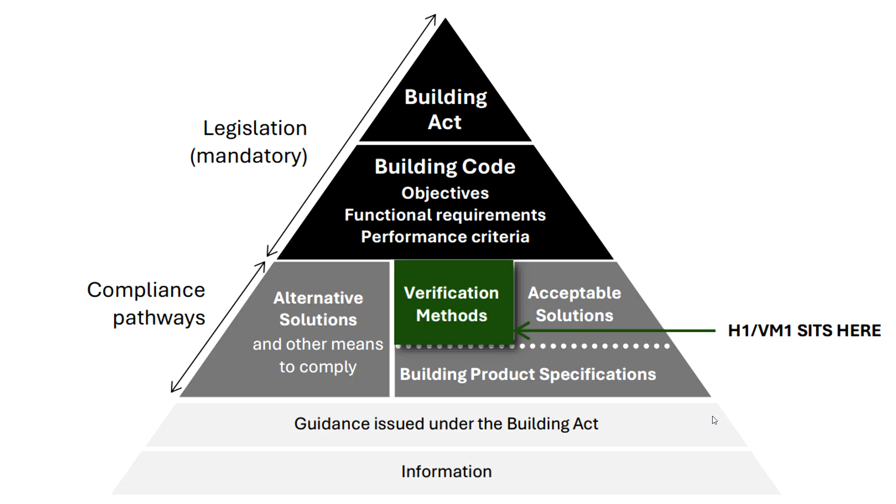Now, as you'll note, they are for buildings up to 300 metres squared, so housing primarily, or buildings connected to housing, occupation of a space equivalent to a house, because you can do communal housing, that type of stuff through this as well.

But the positive side of things from a H1 perspective in general is that the schedule method has now been removed. I say that's positive just because the schedule method in H1 was only providing a very opaque compliance pathway, whereby it was hiding certain elements of design, which actually continues in part the narrative for the calculation method, and it was certainly leading to good outcomes if you design properly, but terrible outcomes if you didn't, and often over-engineering buildings as well.

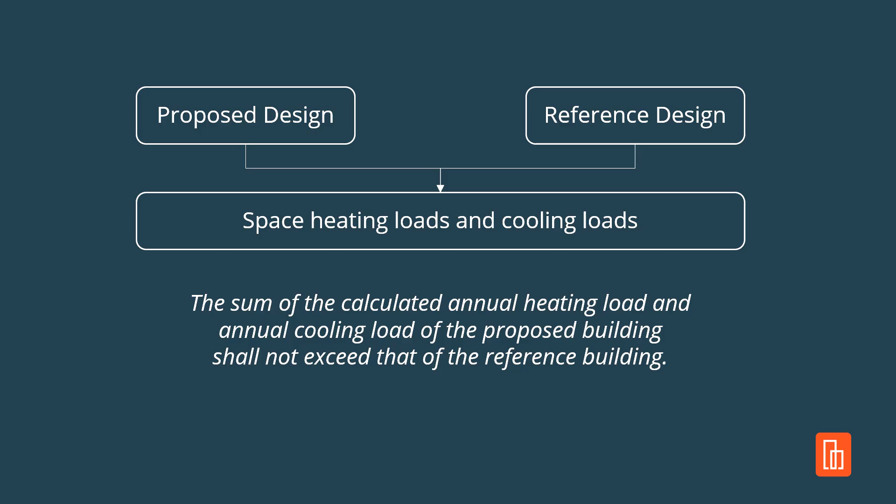So in other words, your proposed design must be better than the sum of the space heating loads and cooling loads than the reference building. So there's lots of stuff going on here.

Now, when it comes to VM1, practically speaking, there's a bunch of things that you can vary from the proposed design to this reference design. So the next sequence of slides are very much around the things that you can potentially improve, like the wall construction, R value, and thermal mass.

The other thing that can change is floor construction R value, really important - I'll come back to that in a second. Roof construction R value and thermal mass, not sure about the thermal mass side in reality, but the roof construction R value can vary between the proposed and reference and provide you a point of value.

The next one, big one, is glazing - big tick in the box there, one of the big ones to focus on in the proposed design. You can also improve doors, though that's very difficult. When I talk about doors in this respect, I'm talking about opaque doors, your classic entrance door to a property. They're very hard and expensive to change, but defaults of an R value of 0.3 are typical, which is pretty bad, given that an R value of a wall is 1.6.

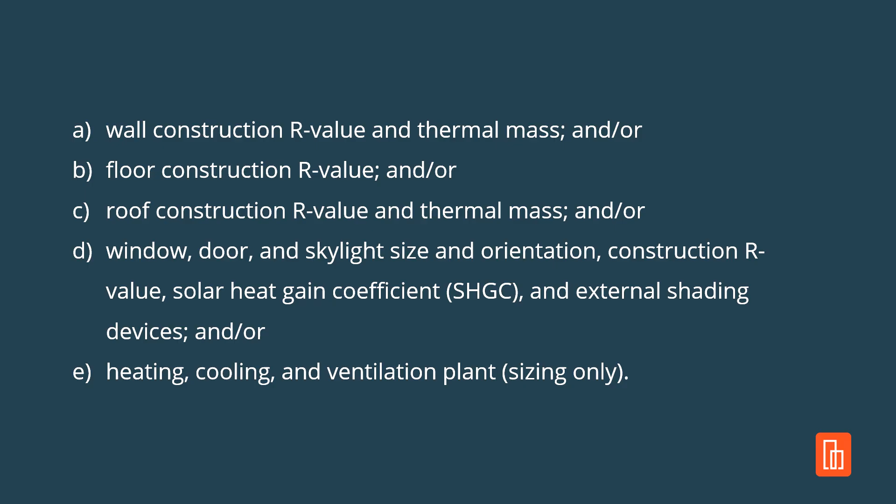And then we have heating, cooling, and ventilation - that's a statement in VM1. Effectively, you can ignore that because it's automated in the VM1 methodology.

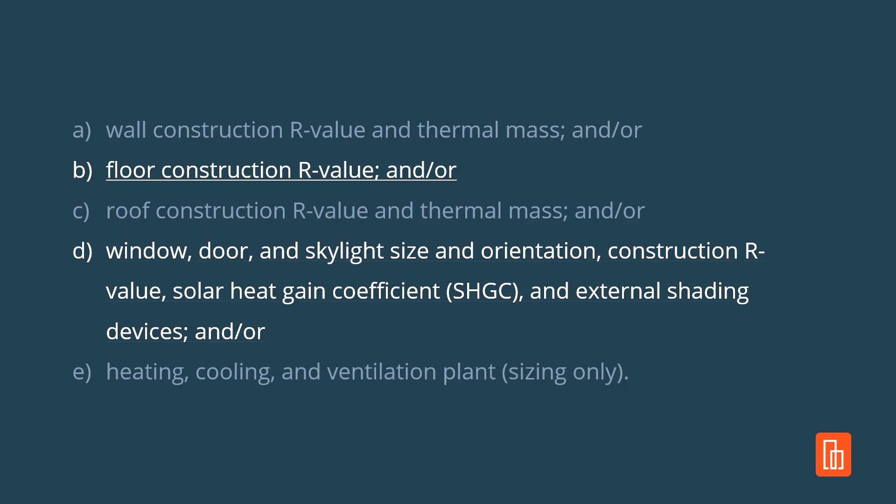So the point to take away is the reality - and I say reality based on the fact that the wall construction R values and the roof construction R values are already in ballpark better value land, and they're difficult to improve for standard construction methodologies. The floor construction and the glazing systems, maybe skylight systems as well, can be improved, and from my perspective those are the points of opportunity to improve the proposed design against the reference design to meet the compliance pathways of the code. They are the big ones. We can circle back to those at some point.

Now, my reading of the code is that there's probably about 10 things that are opportunities, or 10 things we need to understand that have changed. As of a couple of weeks ago, we've already launched all of this on the platform, so you really don't need to worry about any of it - it's all already automated for the reference building, and you can check it out yourself.

But the first thing is that the climate data has changed, in terms of being more specific about which climate data we should be using. They've just referenced the NIWA climate data there, which is fine. If you're over in other software, you have to convert from the NIWA climate data into the weather file format of that software in order to be apples for apples on this point. So not a big one - fortunately the climate data is provided.

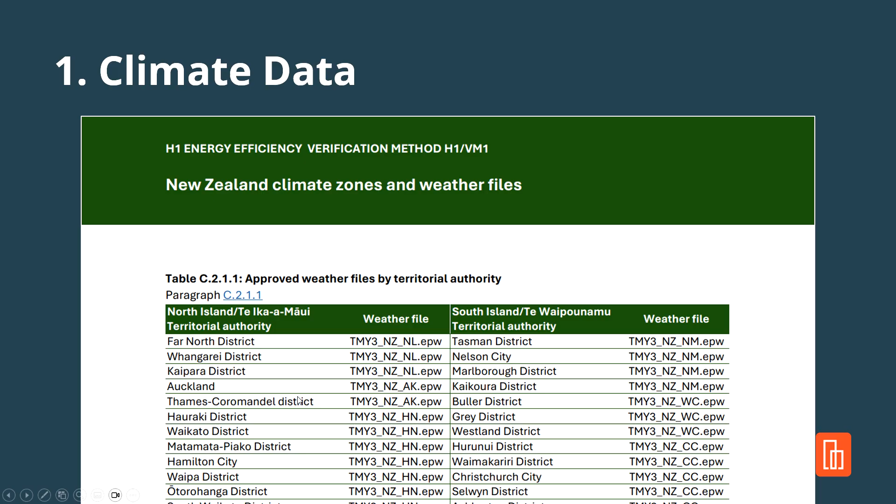It's provided in a list in VM1, so that's a good thing. It is clustered a bit, so you can see here, for example, the far north, Auckland, all the way down - these top three here are all the same climate data. Auckland and Thames-Coromandel district, that's all the same climate data, and all of these ones down here are all the same climate data too. So it is fairly simplified, and I'm not in a position to say how accurate that is.

But the other point here is that you can grab access to these climate files - they're freely available. Go ahead and locate those. They're on the Building Performance website, and they're very, very easy to find.

So have a look at those. And that's climate data done, out of the way, 9 more to go.

Next up, solar heat gain coefficient. This has been a bit of a bugbear of mine, to be quite honest.

There's a hand up there. Diane, did you want to get into that one? It was just about solar heat gain. I've actually put a thing in the chat, but you're already going to talk about it, so that's fine. I'm probably going to complain about it. Yeah, exactly.

So all good. Solar heat gain coefficient has been a really interesting one from my point of view, because the New Zealand industry in general has not been overly aware of solar control in glazing. It has definitely become much more aware of thermal performance, or total R value, construction R values for glazing systems and joinery systems, but it has not been fully aware of solar heat gain coefficients.

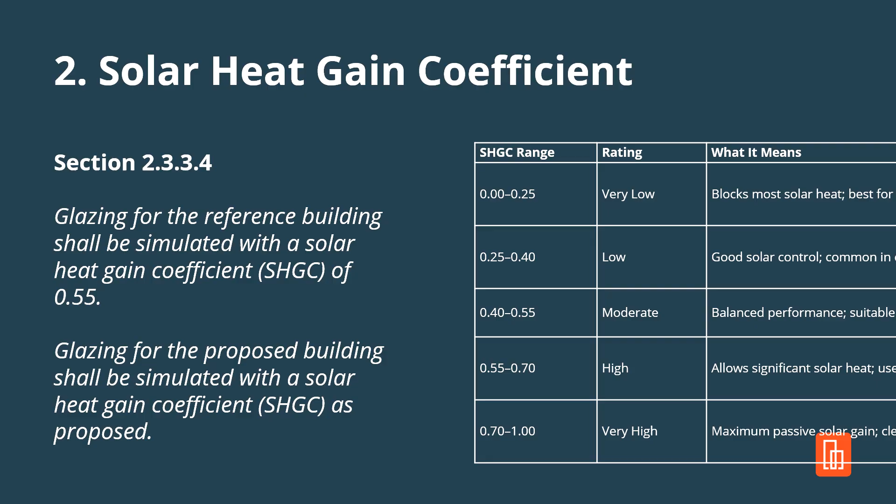And I've been in a position multiple times where I speak to architects and they don't have an exposure to solar heat gain coefficient. I think that's going to change now, because effectively the numbers have been determined for the reference building, which they hadn't really before, right? So there was flexibility, and the new number for the reference building is 0.55. Okay, so that needs to be locked in now.

And if we have a quick look at solar heat gain coefficients, I'm just going to highlight here really what are typical solar heat gain coefficients from a home perspective. Okay, so you do have numbers outside of this range, but effectively between 0.4 and 0.7 could be deemed as being typical. Now you'll note there that I pop on high for 0.55 to 0.7 as a rating, and moderate as 0.4 to 0.55.

The reason I do that is that the moderate, from my perspective, is where all homes should be. No home should be higher than 0.55 under any real justification, unless all glazing is facing towards the south and there's no risk of overheating.

Diane, did you want to jump in there? I'm not disagreeing with anything you're saying, and I agree in terms of the moderate and the high, but my argument is that solar heat gain coefficient should not be in our code. It should be G value, because that's what we use in New Zealand glazing, not solar heat gain coefficient. And they can end up with different numbers.

And if you compare like with like, solar heat gain coefficient is based on a US standard that we don't use in New Zealand. Hence, G value will give better results. So I guess I'm frustrated that solar heat gain coefficient is still in the code.

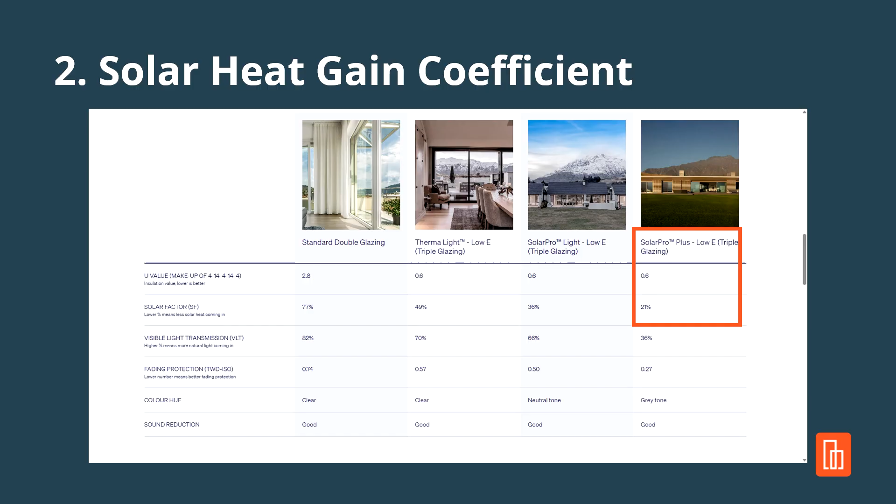And if you get down at 21%, you've got really quite dark glazing, and you're very, very unlikely to want 21% given that the reference building is 55%. So you probably would never pass the reference building. So yeah, there you go. That was solar heat gain coefficient, number 2.

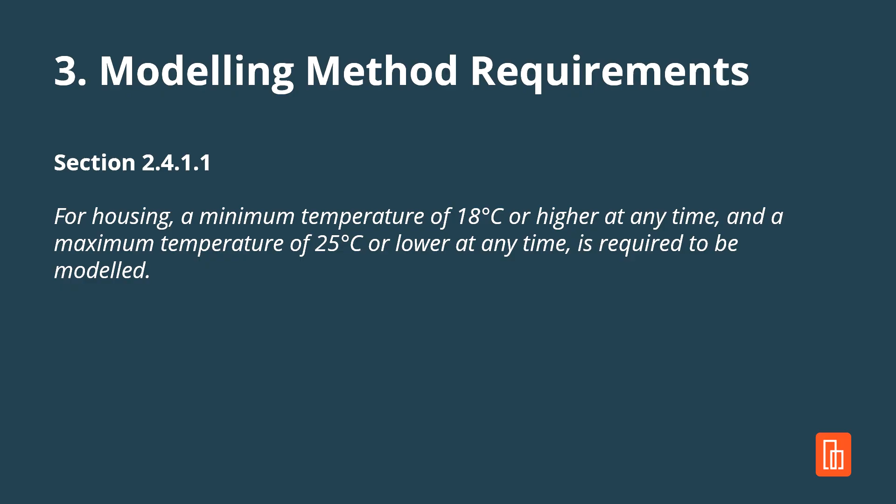Number 3 is the modelling method requirements. This is really just looking at - I forget what, I got it - this is really just looking at ventilation. And I'm just going to flick through to the next part of this here.

So ventilation from a window perspective has been treated as having a number of 24 degrees as when a window is perceived to be open.

And ignore the word salad on the screen. So 24 degrees, and then it was perceived to be closed by modelling methodology at 25 degrees. So that is effectively a maximum of 1 degree when the window can open. Okay, that's now changed, and that's an important change because it will fundamentally change the outcomes of the model.

When you only have a window open between 24 degrees and 25 degrees as per the previous version of the code, then it means that you're going to build up heat within that space, and you're only going to purge the building between 24 and 25 degrees. But now the 24 has been adjusted to 22. So what that means is that theoretically both reference and proposed design will be opening their windows at 22 degrees and closing the windows at 25.

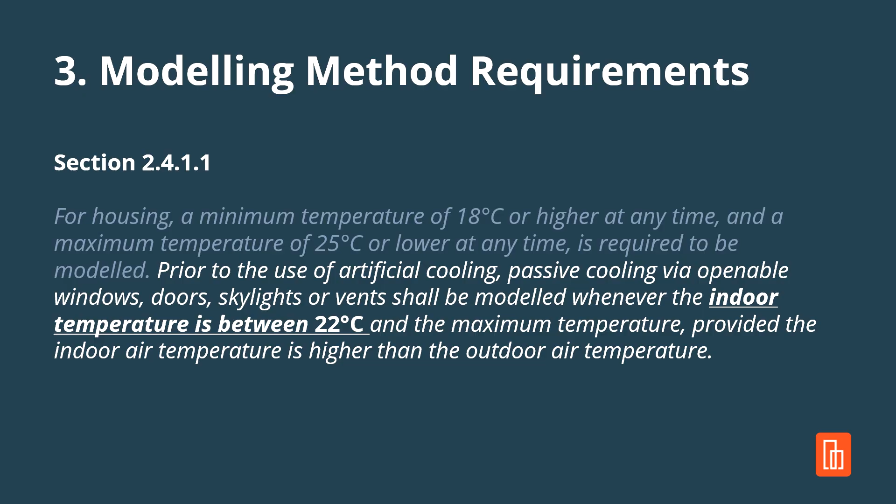That doesn't seem like much, but what it means is there's going to be a big theoretical purging of the buildup of heat within the space that effectively artificially cools down the building and reduces the cooling demand. Okay, so it's a very, very important one theoretically because it means that there's a significant change in the design.

Now, there hasn't been, and you can continue to ignore the word salad on the screen, there hasn't been a massive amount of support in terms of the types of windows, the percentage of opening of windows in H1 in general. So that is a market-based discussion about when things are open.

Our advice is to always err on the side of caution and just assume that effectively windows are only going to be open a small bit, and the last point here is that window restrictors are probably a good way to assume that. So don't overestimate how long your windows and how open they're going to be. Just be conservative about this particular element.

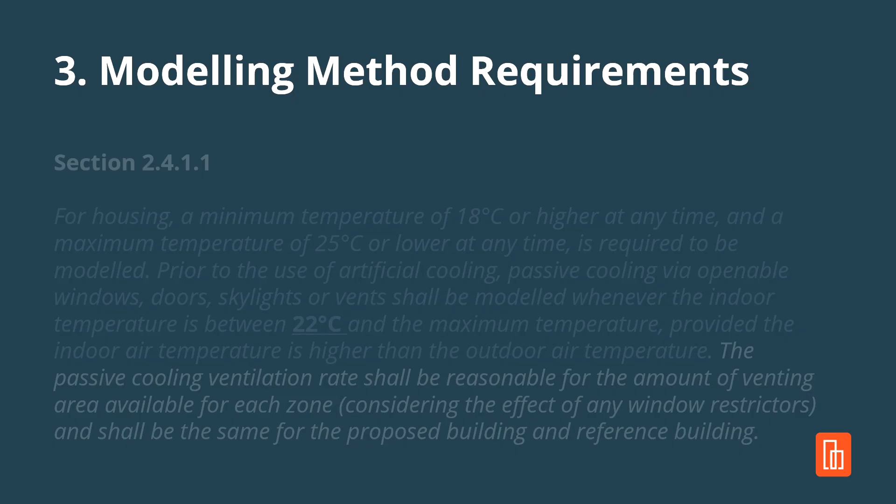So it will change the outcome, and it will mean that the design opportunity that is potentially there today is no longer going to be there with the new version of the code, because the code is not overemphasizing cooling anymore. Okay, so via VM1 there's going to be a reduction in cooling, which is fine because it was overstating cooling requirements anyway through the 24 to 25 degree scenario.

No, not at all. Does this modeling always rely on you having a continuous ventilation system? Because given that in the general building code, we don't require continuous ventilation, so the code allows people to open the windows and requires them to open the windows every day just to ventilate the house. And I'm just listening to this and I'm just like, so this is only for when you have continuous ventilation running, or is this applied to?

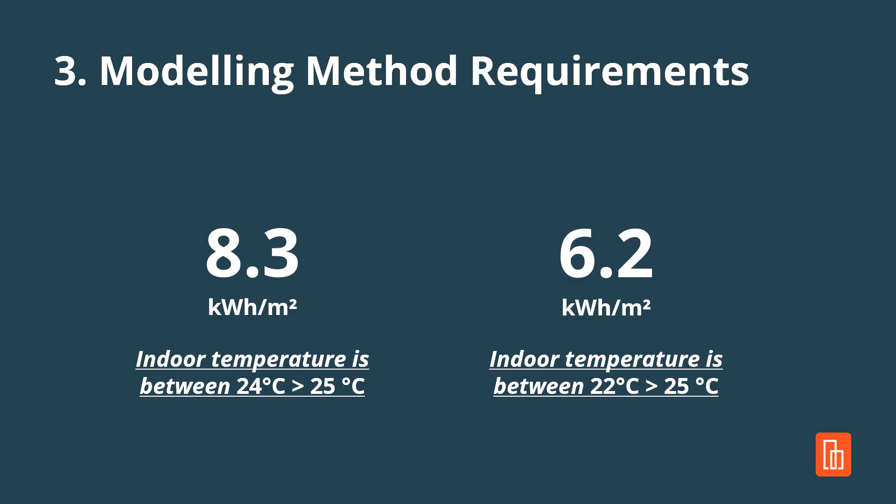The only place this is really of value, I think, is within maybe bedrooms or something like that, where you assume at night people are going to open their windows by a crack, and that's it. So a very local application of it, pretty much as you would do if you were designing in Passive House, for example. Hopefully that answers your question.

I'm going to move on to occupancy and plug loads. Now, there is actually a bit of a Passive House overlay to this particular one, because what we had in the previous version was really, really high internal gains from occupants and from plug loads. Now, there's been a couple of changes here. The big one is plug loads, and the much, much smaller one is just a determination of the occupancy.

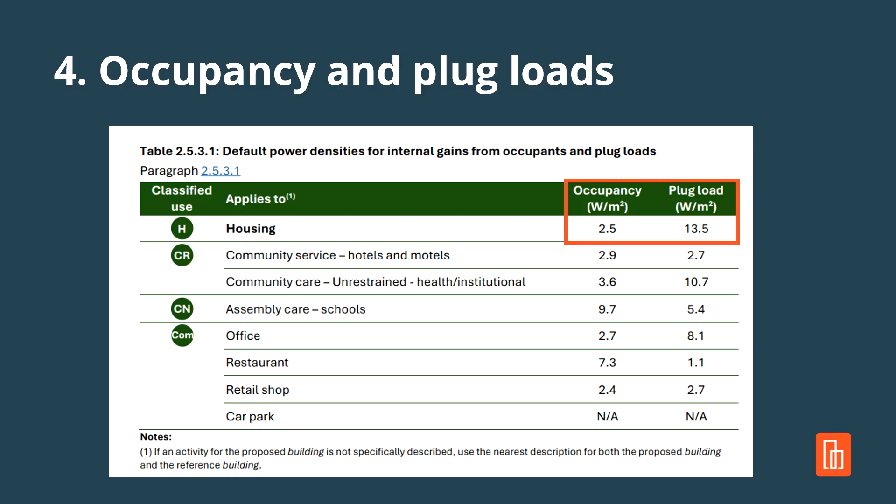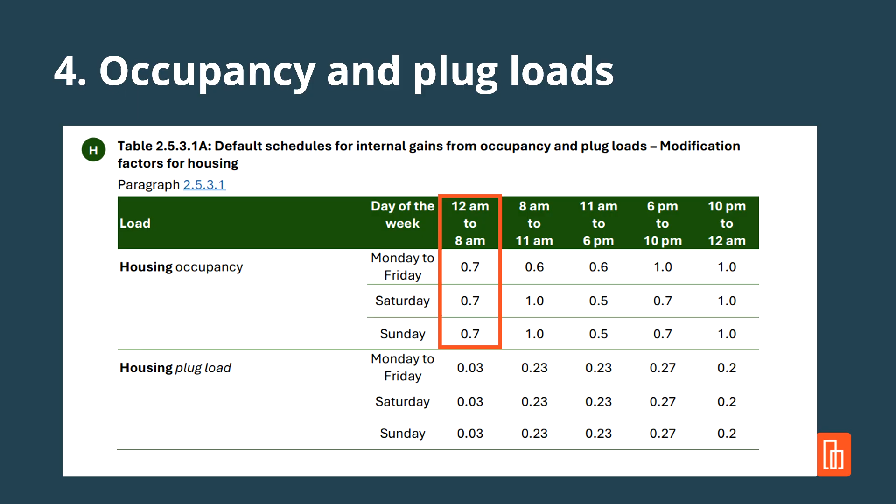All I can say is that 0.7 was 1 at one point. So for some reason, 30% of the people are leaving the house at night. Don't know. We can make up a scenario as to why that's happening. But that is that. So that's handled anyway in the new version of the code.

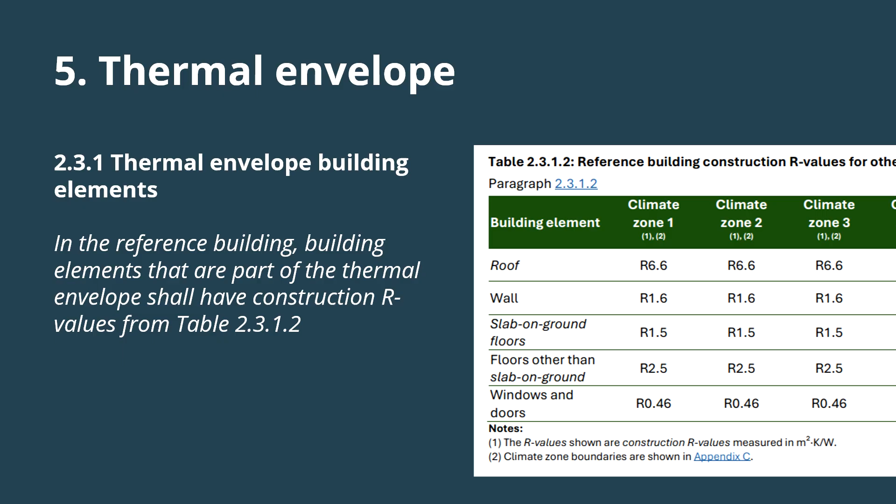Next up, another easy one, which is the thermal envelope itself. Okay, so a couple of tweaks to the construction R values. And I think Diane was bringing up this straight out the gate, just in terms of the wall R values. So we have 1.6s instead of the 2s. I think the 2s and 2.2s. I forget now what the previous versions were, but it's pretty much 1.6s across the board.

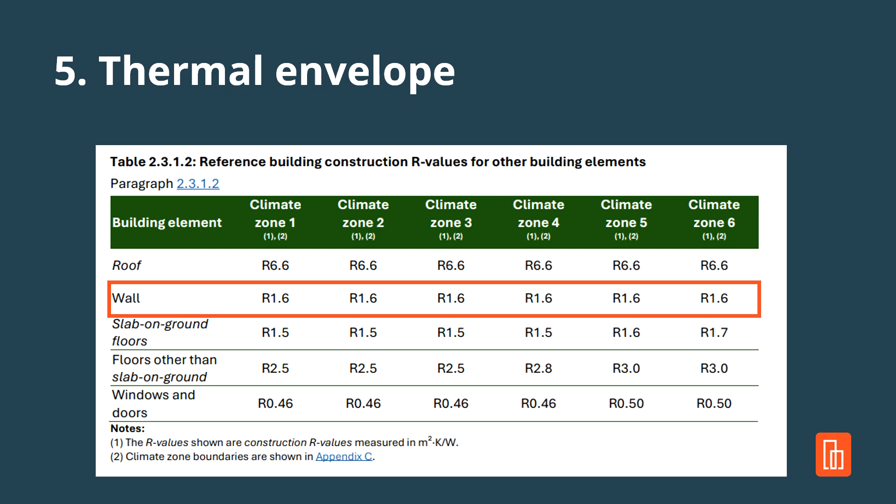And I'll go into the narrative as to why that is in a couple of slides time, but effectively the reference building is now saying 1.6, so it means that it's just a little bit more relaxed. It shouldn't be. They're pretty low values, to be quite honest. I don't think values below 2 should be justified, but they are what they are. It feels like a bit of a political hot potato, that one.

Heated floors, here we have a clarification, guys. The clarification is just essentially that previously, if you were going to heat floors, it was unclear how far you needed to expand your insulation strategy for the heated floor. So, for example, if you had a heated floor in your bathroom, did you have to effectively insulate all of the slab, or was it just part of the slab? And obviously that doesn't make much sense, insulating part of the slab if it's just a bathroom.

Here they're just saying that, hey, look, minimum construction R values do not apply to heated ceilings. Question mark, I still don't know what they are. Heated walls, still don't know what they are. And heated floors, if the heated floor is installed solely in rooms that only contain a shower, bath or toilet. So just a bit more of a relaxing there.

Next up, we have multiple unit dwellings, and this is just again a methodology thing. So if you have a model and it's for housing with multi-unit dwellings in this particular case, the new version of VM1 states that the building may either be treated as having a single thermal envelope, and that's very, very much for the Passive House community, or having multiple thermal envelopes with different housing units having their own thermal envelopes. So it's saying that there's two methods there.

I absolutely disagree with this. I think it's absolutely crazy to model a multi-unit dwelling as having a single thermal envelope, because effectively these are owned by different people.

So if you have a single thermal envelope and you split that up into different internal envelopes, then you're going to get a very different thermal response within each of those spaces, each of those homes, each of those apartments, and they must be designed individually. This is not what this states. This states that you can just dump it all into a single thermal model.

Now, we're going back to the walls now, and really there's two items here. There is a direct modification of the 4214 standard. And there is probably something that Diane was alluding to, that R1.6 for the walls, mentioned a few slides back, default now for the reference building. Where it effectively comes from, in my view, is that if you throw a batt into your 90mm stud wall,

that batt has an R value of around 2.2 with a 38%, which is an industry adopted value based on research done by, I forget who it was done by, feel free to shout out anybody. Placemakers using their Frameology. Thank you, yeah, exactly. So they determined the average thermal bridging through timber stud was around 38%. So effectively, if you throw an R2.2 batt into a 90mm stud, you'll get a value of around R1.6.

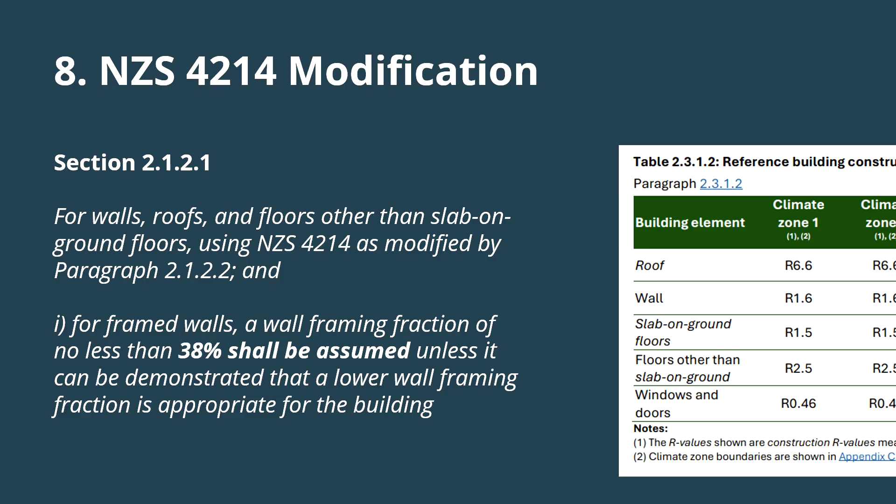There were talks, and we as a company attended those talks, in terms of superseding it with the calculation methodology within PHPP, which I completely agree with, but that hasn't been adopted here. 4214 is a very old standard and has lots of questions around its useful application, particularly in commercial buildings.

Now, getting to the end of this, this is 9 out of 10, guys, and then we'll stop for a few questions and then provide an opportunity to have a quick break, glass of water, and then we can jump into the second part of the session.

So internal dimensions, this is just clarification. Internal dimensions should be used if you want to measure the overall thermal envelope floor area. So that is just a nice clarification that probably resolves the fact that some folks are using external, some were using internal. On our platform you can use external, the middle of the wall, or internal, just with the flick of a switch.

And the final one is just domestic hot water, guys. So effectively you've got to dump a heat load of 100 watts to represent a cylinder of hot water within your building if you have that domestic hot water within your thermal envelope. So a very small and nuanced thing, again, doesn't matter. This does not matter, okay? Whether it's there, whether it's not there, does not matter. It's there as a point of inclusion within the model. Now, that was my top 10.

I'm going to throw the camera on just for a second. Did I miss anything there? Were there any questions before I take a quick break and jump into the practical examples thereafter? Anything, guys?

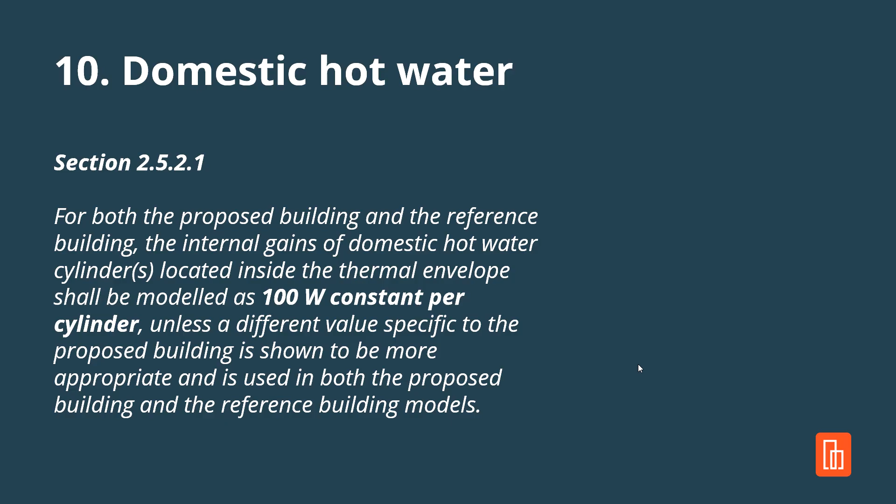Okay, cool. Well, if there is none, I've got some practical examples that I'd like to go through, and I've got a model. The model has been set up for worst case examples, extreme examples for Auckland and for Queenstown, just because I wanted to look at the extreme climate positions. If anyone wants me to set up another model in this session, I will. Just shout out where you want it, maybe something that isn't in one of those locations, and we can go ahead and set that up. So if you want to pop something into the chat, let's do that.

I'm going to just hold off for a couple of minutes while I grab a glass of water, and I'll be back maybe in 2 minutes time. So 2-3 minutes. If you want to jump off, grab a coffee, glass of water, go for it, and I'll be back then. Okay, I'll speak to you in a minute. Okay, that was enough time for a glass of water for me. I still have it here.

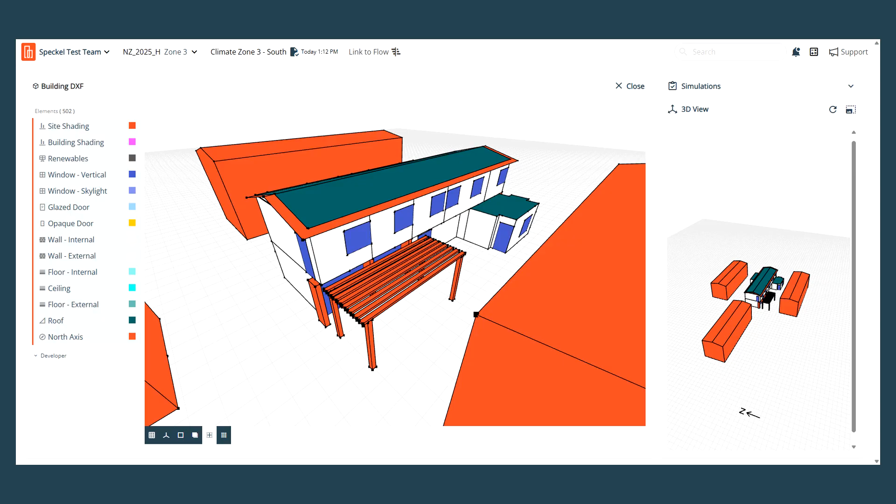Now, let's jump into some modelling on the platform. So we have a model that we can use here, and I'm just going to outline exactly what this model represents now. So here it is here. Move past the questions. It's the classic model that I use. You'll note that it has some external shading there, both from a surrounding building and locally here. And we'll have a whiz around that model in a second just to have another look at exactly what it is. We can go through a scenario of looking at multiple climates.

As I mentioned, I've looked at Auckland and Queenstown just this morning to set up some models, but we can look at Wellington and Christchurch as well. I've got some building envelope assumptions that I've thrown into the model. I'm just going to run through these. Walls, just timber studs with a 38% framing. So just a reminder there, we're going to pop in probably a batt of R2.2 into those in order to get our R1.6 in the walls.

Slab, the slab ratio happens to be 1.6, so that's a calculation of the area to perimeter. And that renders an R value of R1 according to the code. Now, that's an uninsulated slab, and that's certainly not going to be a preferred outcome as you get into the colder climates. I've popped in a straight batt of R5 into the roof. That renders a much smaller thermal bridge generally, because you have less thermal bridging within your roof/ceiling systems than you would typically in your walls. So I've just popped in an R4.6 to represent that R5 batt.

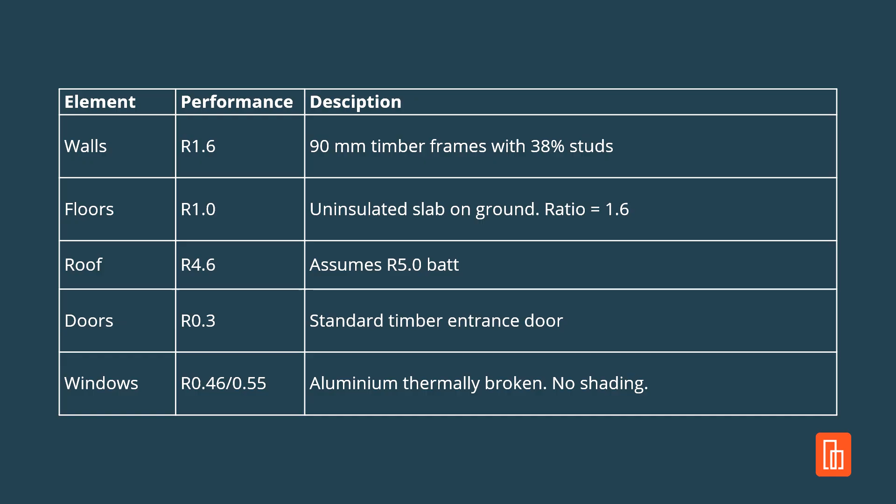It could be a little bit lower, to be honest, but they are just assumptions for the time being. For the doors, we've just popped in an R0.3. Doors are terrible thermally, awful. So I've represented that value here, and we're going to put these into the verification method and see what happens. On the glazing side, just nominated R0.46 as a standard value, and 0.55 for the solar heat gain coefficient, representing aluminium thermally broken glazing. The numbers might jump about a bit in terms of the actual glazing systems proposed, but let's just stick with those as examples, and no direct external shading on the windows.

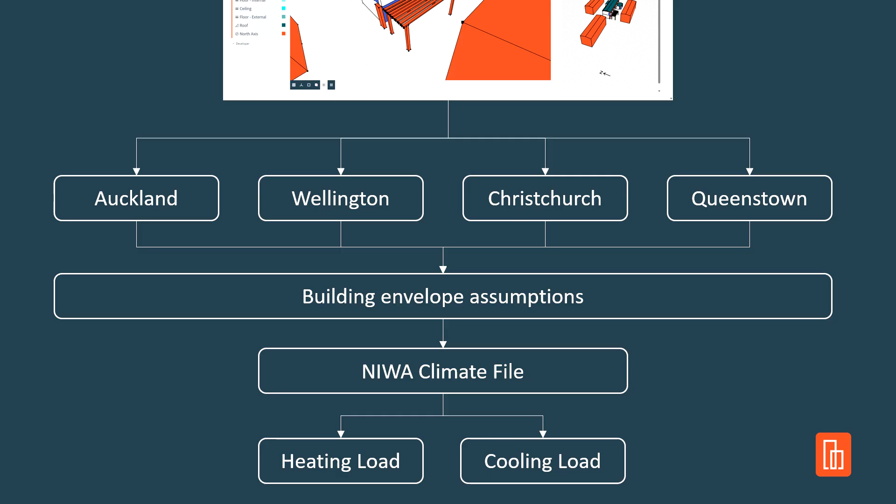We're of course going to use that NIWA climate file as mentioned earlier, and we're going to generate those heating loads and the cooling loads in the model. Now the design looks something like this. This is a design that's free to access, and I've just adopted this so we can have a point of context. I haven't adopted the shading on it, and there it is there.

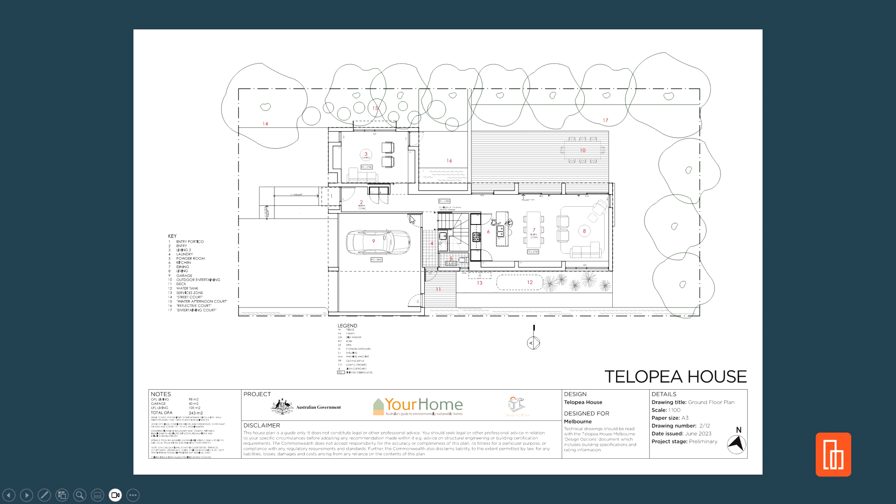We're going to learn a bit more about this, but effectively it has a couple of living spaces down below. We have the garage there. The garage is not included as part of your thermal envelope. So if you imagine there's a line, that internal line there is the actual external line from a conditioned space perspective. So the garage is not conditioned.

And then we have 4 bedrooms up the top. I've assumed models both facing towards the north, as these models are, so a passive solar design methodology, but I've also flipped them around and faced this wall here toward the south as well. So I wanted to make sure that we could look at multiple scenarios.

Let's go ahead and first of all we'll have a look at a couple of models from a verification method, and then maybe we can go ahead and create some more models. I'm just going to focus on the New Zealand climate of Auckland and Queenstown to start with.

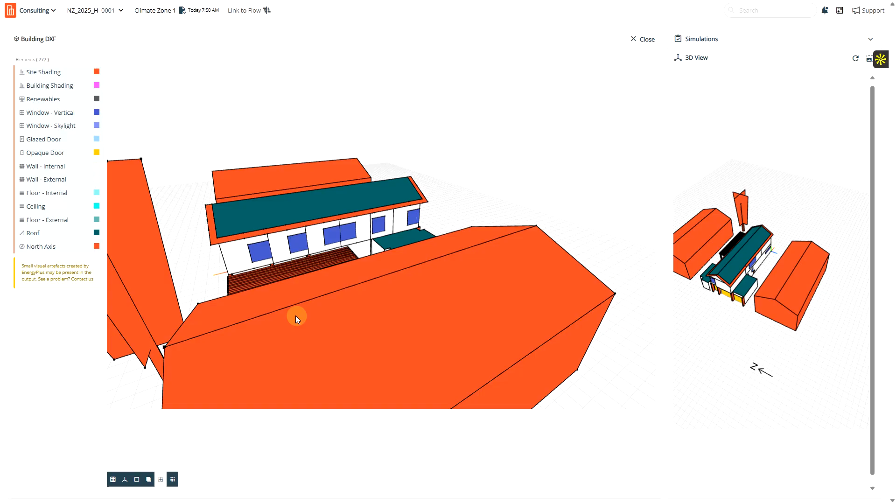Okay, so there it is. There's a model. It is what it is. That there is supposed to be a tree. It doesn't need to be in your model by any means. We can go ahead, I might just turn off some of this external shading just so we can kind of see this to start with.

So there you go, it's a 3D model. It's been built out from a 2D model. You can import this into the platform should you want to, or you can draw this directly. To be quite honest, it doesn't take long to draw it directly once you get the hang of it. It's just whether you have an acceptance, a tolerance around redrawing modeling. Completely up to yourself, and this can be used for multiple things.

If I go ahead, I'm just going to go ahead and get rid of that for a second. You can do daylight modeling, carbon modeling, design day. We're going to do H1 modeling method and the calculation method on this particular model.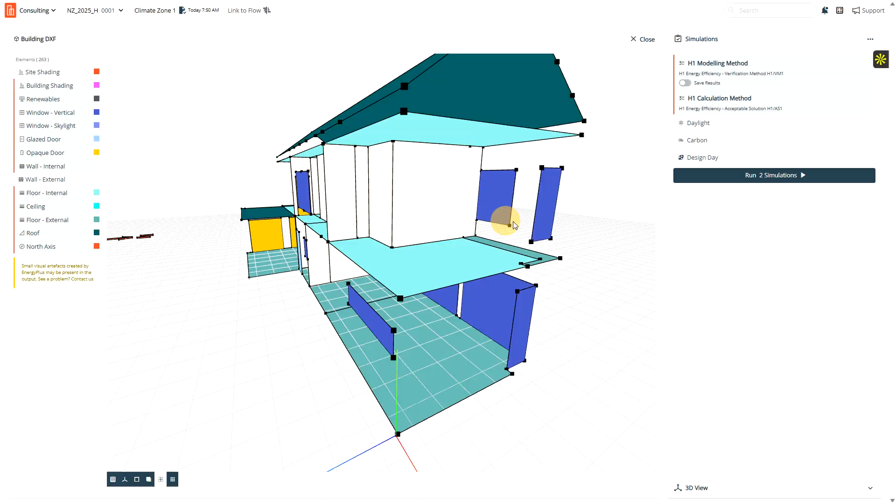The walls, as mentioned, are all the R1.6. I'm going to go ahead and turn those off so we can see the internal walls and the glazing. The glazing are all 0.46 for the total system value or the construction R value. And then we have a solar heat gain coefficient - much to Diane's disappointment, it's not called a G value, and it is 0.55.

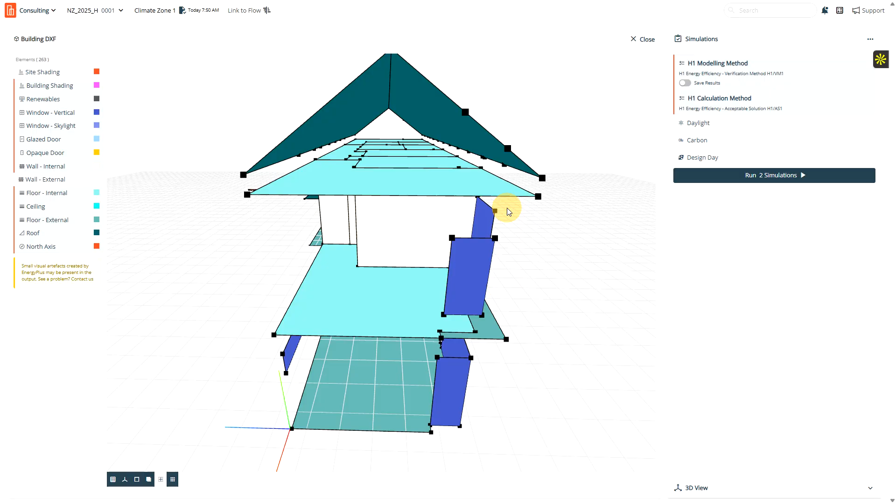And then we have those roofs there. The ceiling in this case has a batt in it, R5, and that renders a 4.6 construction R value there. And we also have some roof systems there, and that is exactly the same.

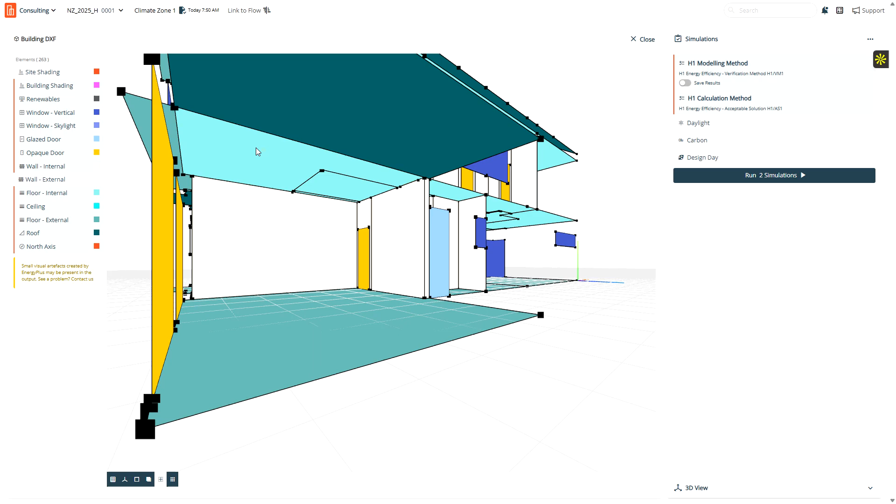One thing I didn't specifically model in this case was this roof here, and I'm calling this a roof here just because it is the roof of an unconditioned space, being the garage. So we'll have to nominate a value for that. What else? And these slight overhangs here, if I pop on the wall for a second, I turned it off - these have to be nominated as well because they're part of the thermal envelope.

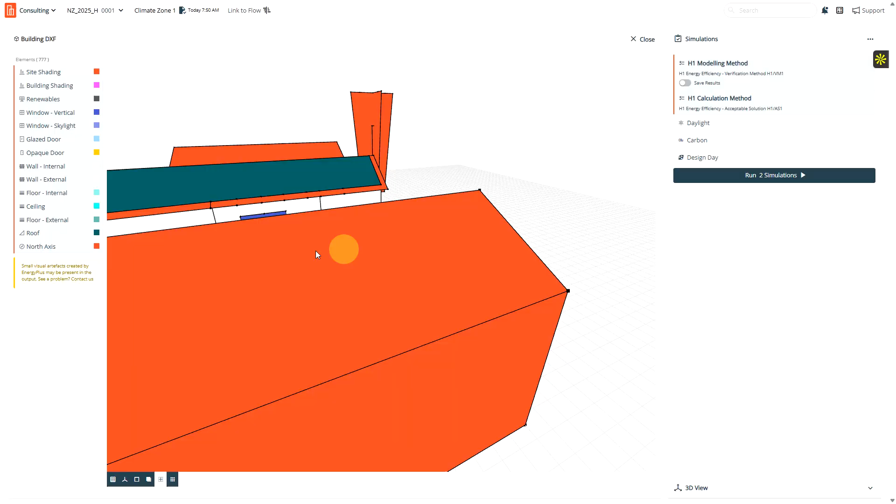Okay, so we're going to look at this fairly easy. Now, here we are at the ground level, and effectively we've gone ahead and drawn our zones, and we've given them a name. We've got 1, 2, 3 that are living spaces. So these are just living spaces. You don't actually have to do all of this at all.

You could put this into the one model, as I was talking about earlier, for multi-residential - I absolutely don't agree with it. For compliance purposes, for residential, it may be okay on some occasions, but you will lose the quality of information coming out of the VM1 model if you do. So it's kind of okay for the calculation method, but if you want to actually get modeling information out of your model, then you're going to split this up, not have this into a single zone.

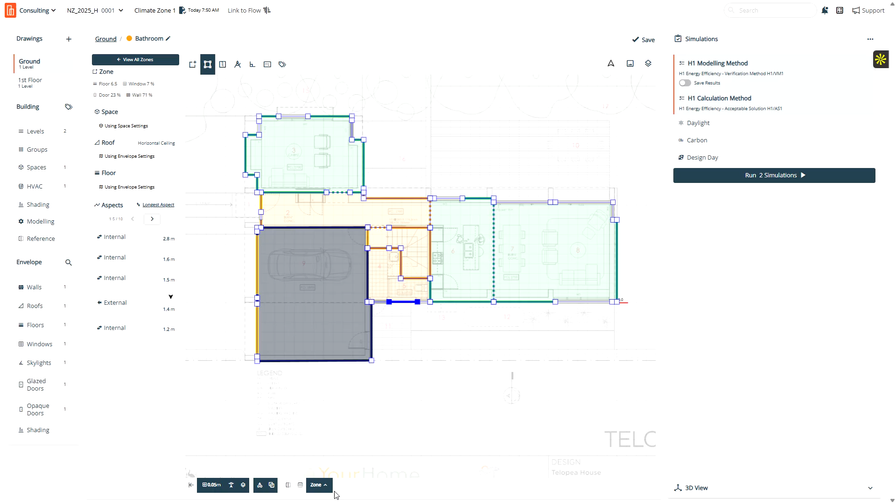It's going to be multiple zones. But if you're only doing the calculation method and you're really just looking for a compliance outcome, then it can be. But anyway, so you've got these, I guess, these transition spaces here. There's actually a bathroom space. I'm just going to nominate that as a different colour there, just so we can all see it.

Then you've got the garage. Again, the garage is disabled from a thermal envelope perspective. It is out of scope.

On the first floor, we actually have a couple of toilets there as well, so I'm just going to nominate those with the blue as well. We've got the grey for the bedroom spaces, and then we have this kind of walk-in robe here, which I'm going to nominate as well as a bedroom space. So there you go, that's what the model comprises. Not a great deal, fairly simple from my perspective.

For this model, we've nominated everything. Let me cancel that, save that. Never forget to save. We've modelled everything as per our discussion, or my discussion, trying to relay to you.

We've got the 38% studs here, and the R1.6. The 0.55, actually that's the default now, I think I might have skipped over that. They've just standardised the default for the solar absorptance if you don't have a value. You've got the roofs here, 4.6, that's taking into account the R5 batt. You can see that's nominated there.

Actually, I'll go back to the roof for a second. You've got two different roof systems here: the roof system at the top of the building, and then the roof system for any roof that is not at the top of the building. A bit weird, but it's the fact that we use EnergyPlus under the hood, and it needs this information.

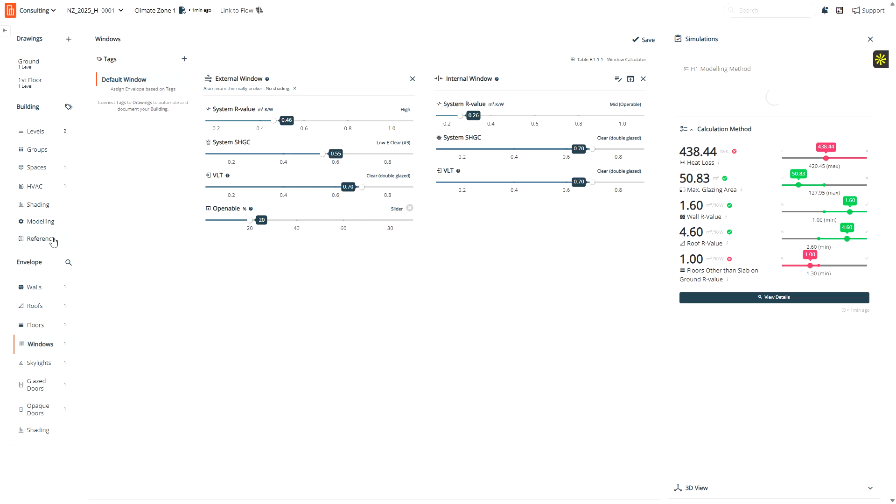This is really just about... oh sorry, someone hadn't been able to sign in. This is a value that hasn't been determined, and it's really about how much of the window is openable back here. So we're saying it's openable by 20%, and then you have to go in and nominate how much that 20% is open by. I know it's weird, but that's what you have to do. Once you nominate how much it's open by, and we're saying in this particular case it's open by 50%, it actually means the windows only open 10%. So it's open 50% of its openable area, being 10% of that 20%. Anyway, it's weird and wonderful.

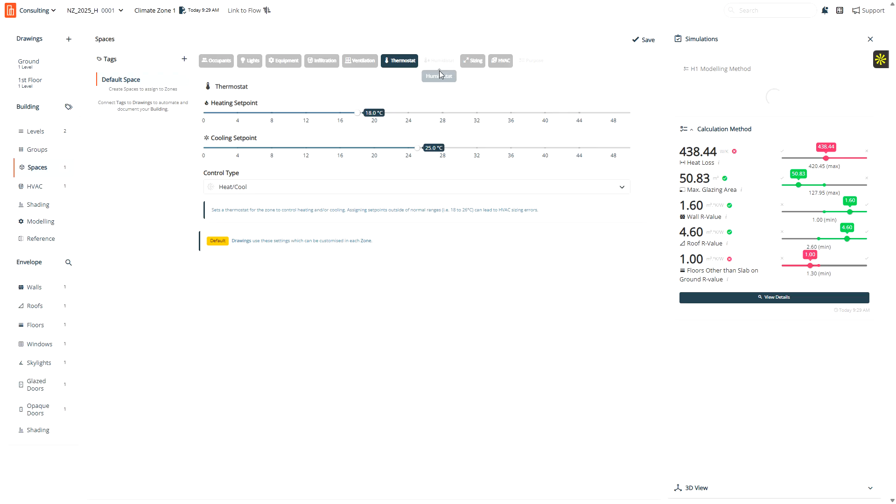Thermostat settings, again, a lot of this stuff you don't need to touch. You don't need to really care about any of this stuff if you're doing a straight push through for the VM1 calcs. Don't need to care about this. Sizing, everything is done for you, it's defaulted.

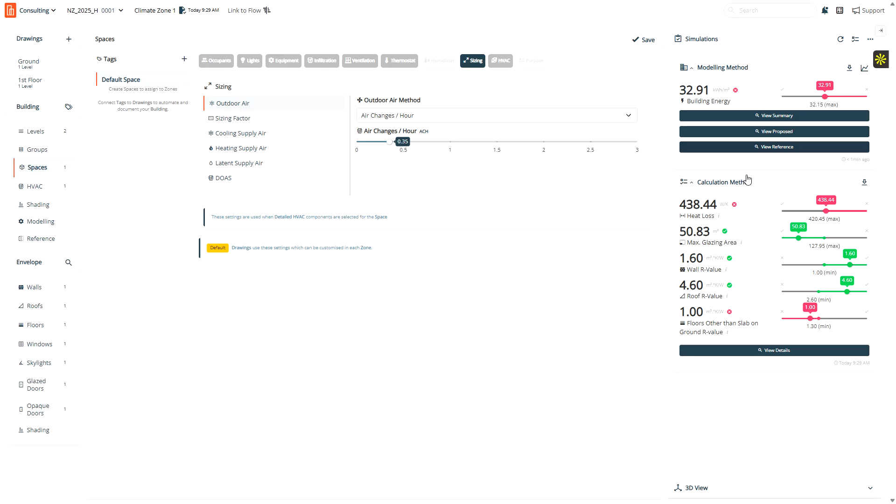And we've got a series of results over here on the right. So we can start talking about results straight away. This is for Auckland. How do we know? Well, I can go back up here and see that it's for climate zone 1, and it's showing results for the calculation method over here and for the modeling method. This is not about the calculation method, but I just thought you may as well look at it, it's really useful sometimes to look at the quality of your model to make sure things are correct. Very familiar stuff in the territory of compliance within New Zealand.

You've got the heat loss of your proposed building, heat loss of your reference building. This is exactly what the code describes. So effectively you can go back and cross-check all of this stuff to say, okay, is that reference building correct? Great, it's correct. Then I can evaluate and be confident that the proposed design is also being modeled correctly.

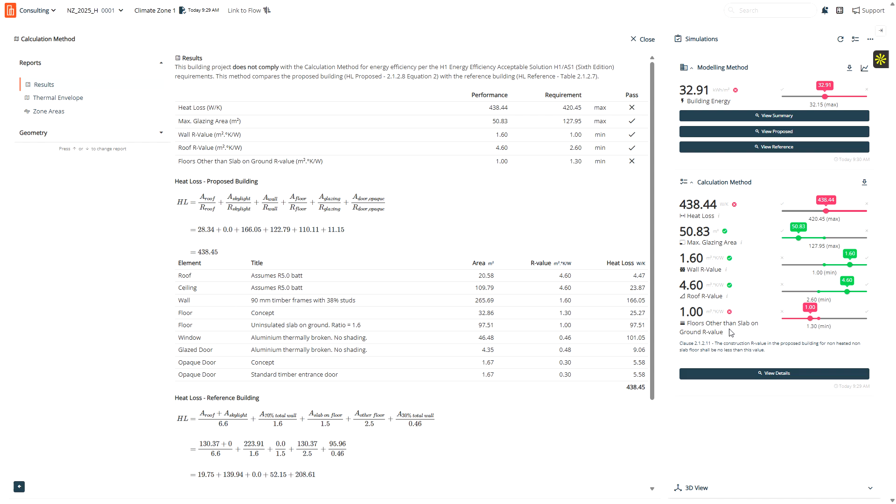And all we're showing here is that from a heat loss scenario for this particular design, probably driven by the fact that the R value of the slab is so low, we're failing in the calculation method. That wasn't the point. Probably the more important point here is that you can look at the actual construction when you run a quick calculation method, because it's much quicker than a modeling method, and understand what you're actually modeling.

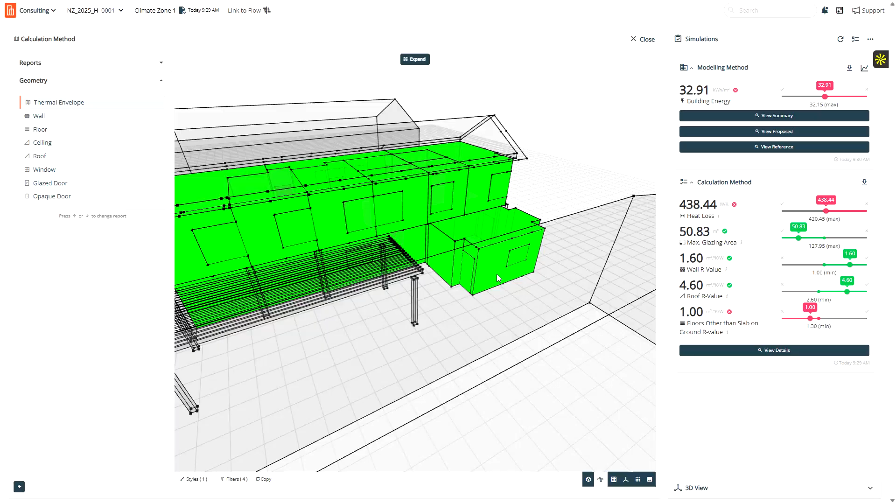So this green blob here is your conditioned space, okay? This is just saying, this is what I'm modeling in VM1 and in the calculation method. And then you can go and look at your walls and look at the nominated values. You can check whether everything's correct, okay?

So this is really just about, hey, inputs are the most important thing. Get the inputs right, then you can start to get a measure and a level of trust on the output. We recommend that you go through that process and get an understanding of everything that's been included in your model. This is a quicker way to do it than keep running the modeling method. But the scope here is the modeling method. So in this particular case, the calculation method has failed, and the modeling method has also failed, but it hasn't failed by much actually.

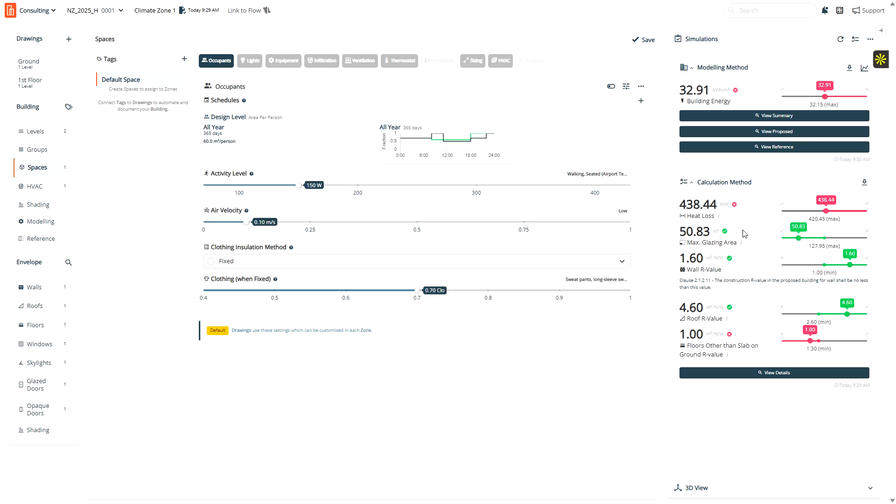So we're going to transition over from the calculation method to the modeling method now, and I'm just going to show you a summary. This is probably some of the stuff that, as Lee was mentioning earlier, has some challenges in terms of understanding the full scope of what's being modeled here. It's not super easy when you first look at this, and it depends whether you come from an engineering background or an architectural background.

But effectively, this is just saying, as per the code, that we have space heating loads and cooling loads, and they must be below a value, and that is the reference value there. Must be less than 32.15, and that is the value you can see over here, which is that target value, pretty small there in the top right hand corner. And based on the floor area that's been modeled, we've got another value. This is our proposed design, and the story starts to narrate as you go down the screen here.

And if we look at one thing at a time, let's turn off the cooling energy here. We can see that the proposed design is using more heating than the reference design, and that's a part of the narrative, a part of where we can improve the design and get a better outcome. When we look at the cooling side of things, we can actually see that the proposed design, and this is not by design in terms of supporting this narrative in any way or form, it's just chance, that the proposed design here is actually using less cooling than the reference building.

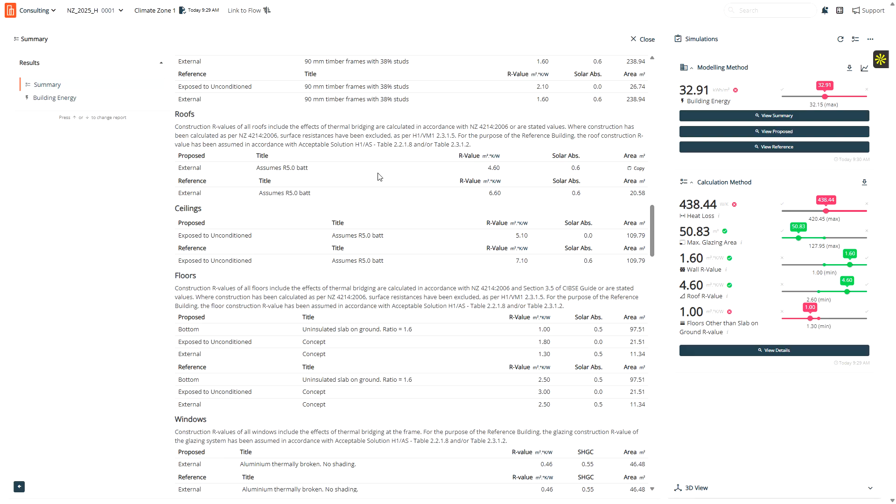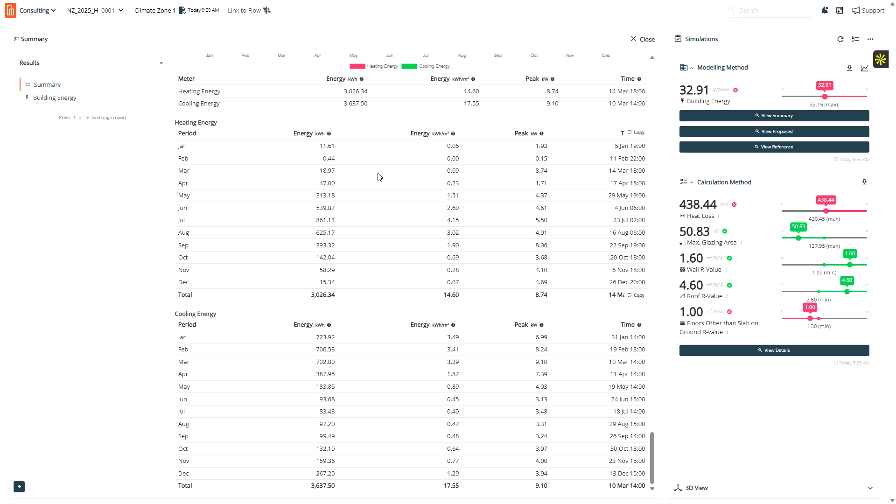Okay, so this is the report. You can print this out, put your branding on it, blah blah blah, you can do all of that, and this is what goes through to council, and it is detailed. What I recommend in all cases is that you write a letter or a brief summary, you provide your drawings, and then you drop this in the back as the proof of where you have substantiated your compliance findings. That's what I recommend each and every time, because that's the best way to do it.

And if you've undertaken training on the platform, show that training, show the certificate, show the competency of the user that has used the platform, and that's the way we find you get the least resistance and the most amount of confidence that you know what you're talking about when it comes to compliance. All of that is pretty easy.

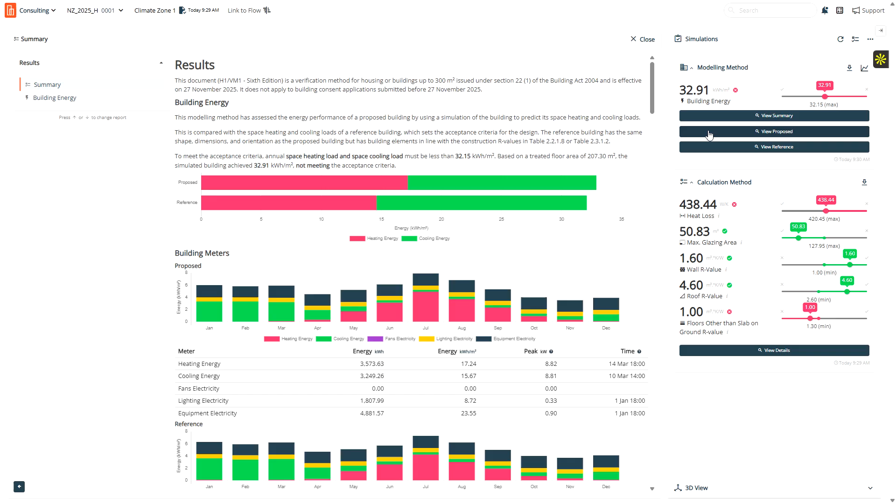Now, when it comes to the model itself, we can have a look at the model. And this is where we get a lot of information about the proposed design and the reference design. Okay, so I'm just going to click between the proposed design and the reference design, with the reference design being the thermal envelope described within the VM1 calculation method, and the proposed design being your proposed design that you're comparing against.

Okay, is anyone unclear at this point about that? Because I just really want to make sure that everyone is cool, that we understand the basic principles of what we're doing from a reference to the proposed and the space heating load and cooling load. Is that clear? And there's no issue if it's not clear. When things go cold and I don't get feedback, I always get a little bit paranoid at this stage. No, sounds like you guys are completely across it.

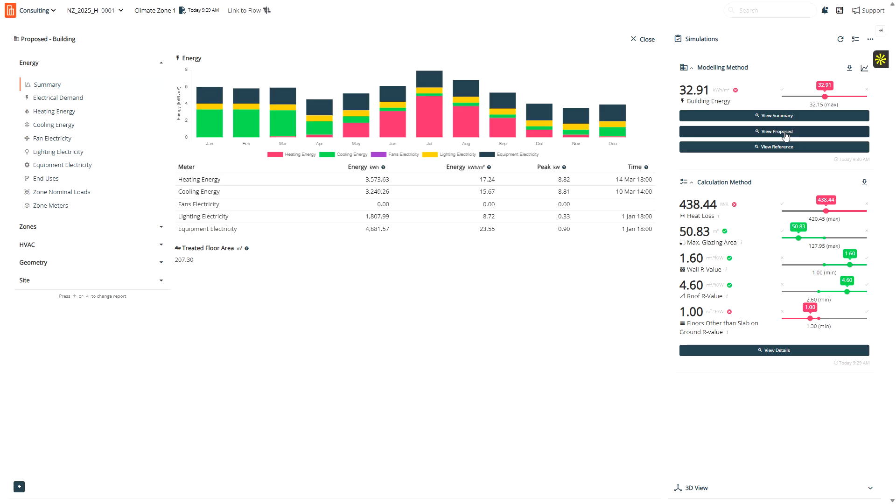Now, once you get into this stage, we want to look at the proposed design, and we're asking ourselves, how are we going to get that additional benefit? Now, you can look at a whole heap of things, and I'm going to keep it easy. You can look at heating energy, and of course you can compare that against the reference building. Do the cooling energy. Compare that against the reference building. So you can do that if you're really into the numbers.

What we find the most beneficial thing to do is probably to go over here to your zones, and then you can see the model itself. So you're not deep into the numbers here, and you can select each zone and say, okay, what's happening in each of these zones from a heat transfer perspective. So if you wanted to select one here, you can select that one and you can see all the information.

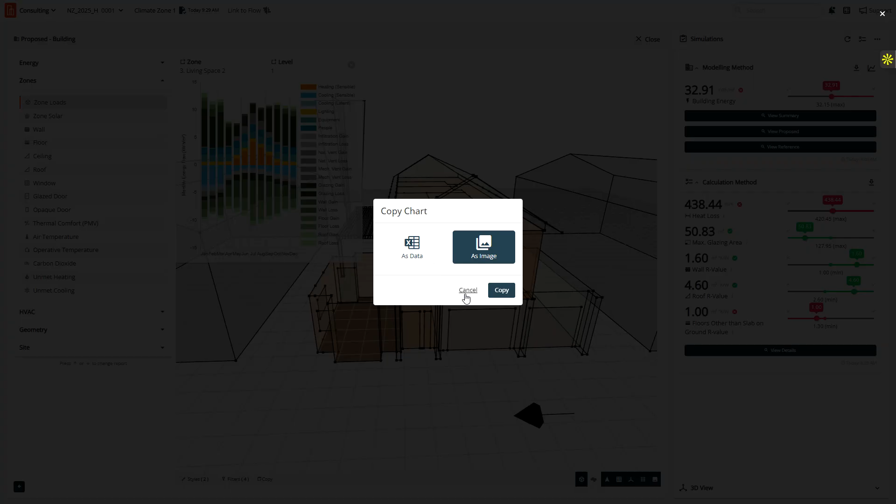And if you really want to engineer your way out of this, you can export the data and work out exactly what's happening in the model. You can export images as well to support your findings, and pop them into an email to communicate them with the design team. Probably the best thing for folks is looking at these selections over here: wall, roof, floor, ceiling, etc.

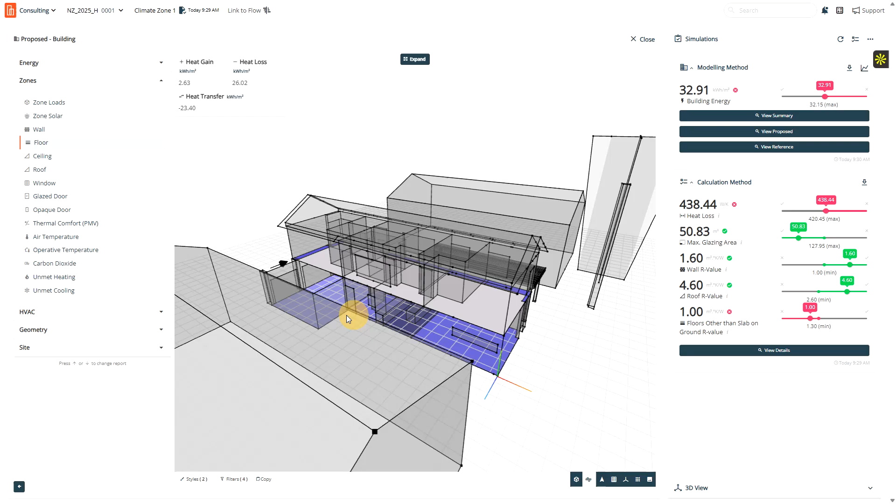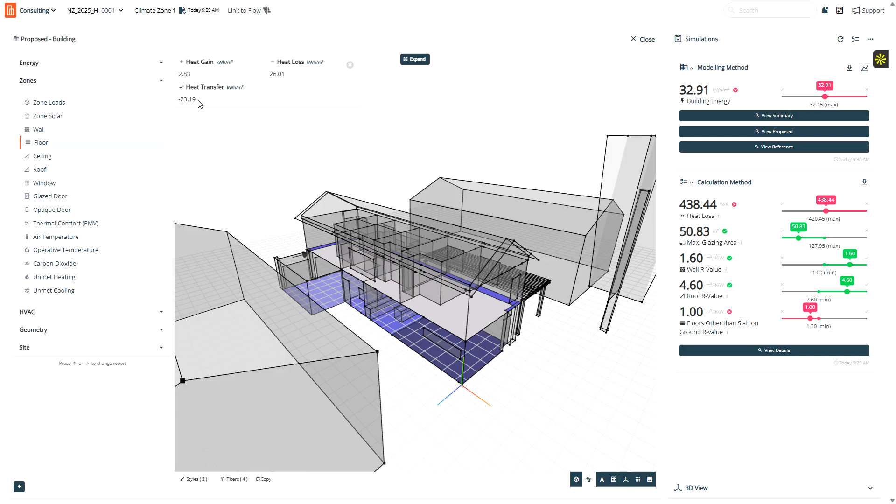If I start with floor here, we can go into what's happening at the floor, and then maybe just select a floor. Okay, so if I can get your attention up here: heating gain 2.83, heat loss 26.01. So there's kind of this net heat transfer here of negative 23.19. We're almost constantly losing heat to the ground via the slab. So it seems very obvious that that's a point of improvement that we could undertake.

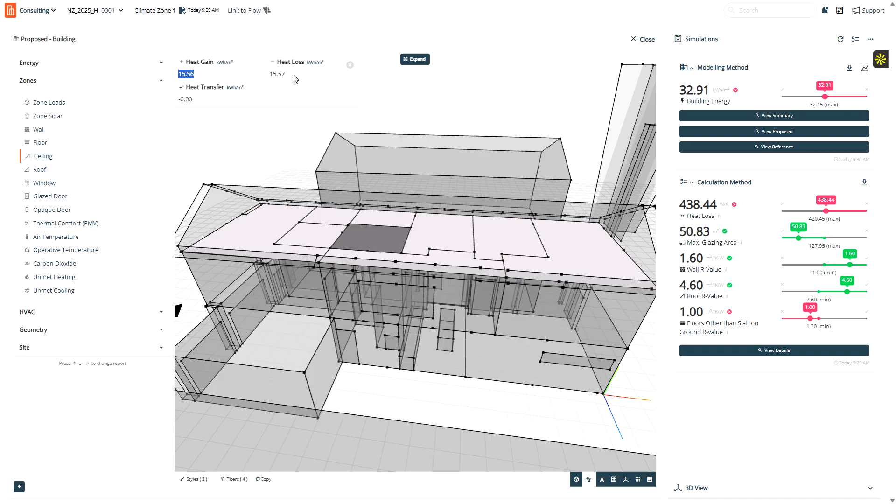On the ceiling side of things, let's go ahead and select the ceiling. Remember, this is a total R value of 4.6. And again, not by design, it's more by intuition, to be quite honest, but you can see that there's effectively no heat transfer through this ceiling system in Auckland with this particular design, because effectively the heat gain and heat loss are exactly the same. So this is telling us that this particular ceiling is perfectly designed.

Again, I didn't do that on purpose. I'm just really good at my job. That was a joke.

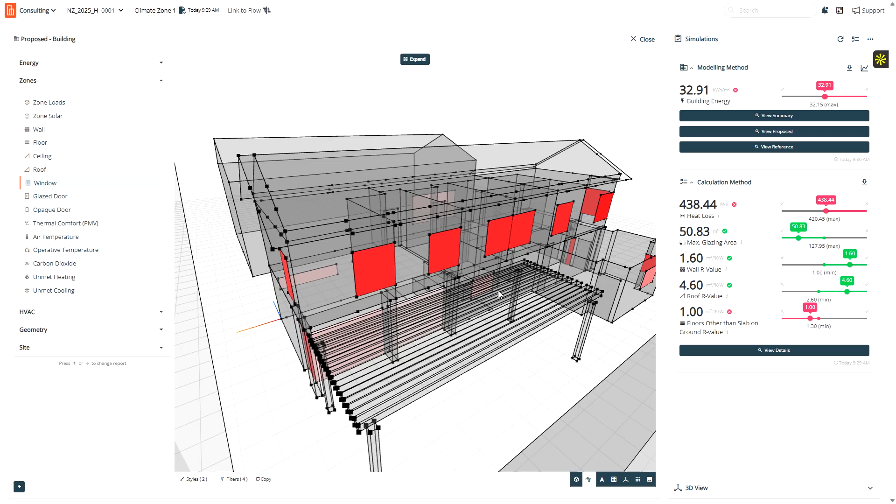This is a big one. Okay, and this is where we really need to be cognizant of what we're doing from a design perspective. Now, over in calculation methodology land, we know nothing about the impact of heat gain through our windows. We're completely uninterested in that question, and it's probably one of the most important questions you can ask in your design. Because at the moment, the calculation methodology tells us that we failed, fine. It might tell us that we pass, but it tells us nothing about how much heat transfer there is here.

So if I'm just selecting one of these windows towards the north, it doesn't make a difference which one I'm selecting. Actually, I'll select one here, and you can see one here, different color. The lighter color means there's a lot less heat transfer, okay? So if I select this one here, I can see the heat gain is 390, the heat loss is 66. Great, we've done a great job from a heating demand perspective.

We've improved the design. But from a heat gain perspective, that's pretty lousy. Like 390 kilowatt hours per meter squared is a lot of transmitted heat through that window. And that means there's a significant design opportunity to improve that without necessarily impacting the introduction of heat during the winter period when we want it introduced into the building.

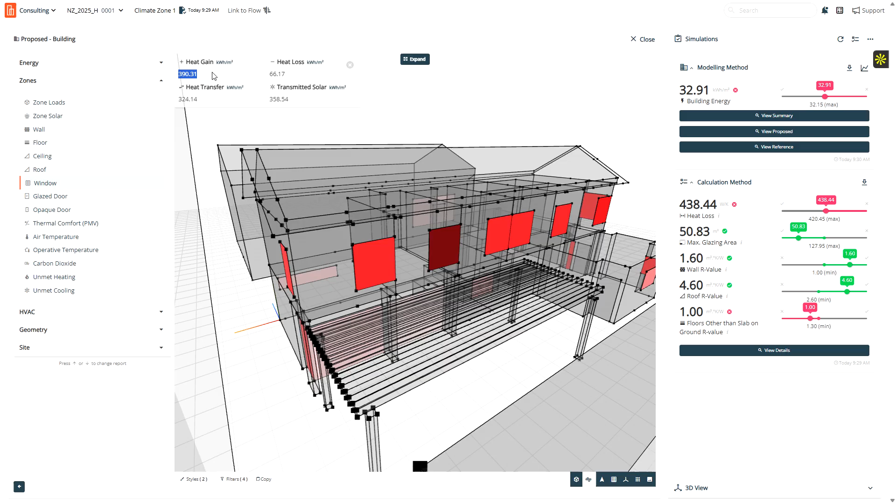What this intuitively tells me is that the comfort within these bedrooms is going to be questionable, because these bedrooms are not going to have their windows open during the day. They're just going to be left, typically. And when you go into those rooms at night, they're going to be stuffy, they're going to be hot. They're going to need the spaces purged, because the building is going to be fairly well thermally insulated.

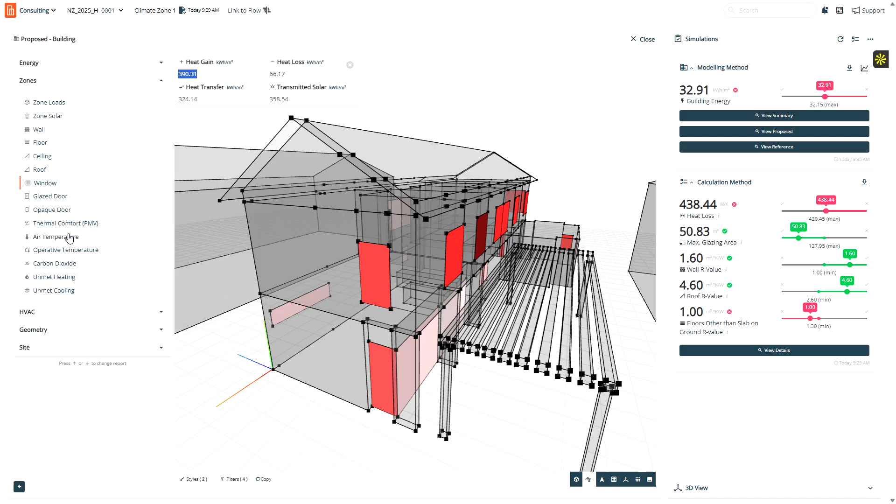And how do we know that? Well, we can go to the air temperatures in the space and start to see that there's quite a lot of temperature points greater than 24 degrees. Okay, so it's telling us that actually there's more that needs to be done in these spaces than what the calculation method is telling us at all. So there's a major value add, and there's a lot more stuff that we can go through here. I just wanted to get to the point where we can understand exactly what the difference is between the calculation method and the modeling method before we continue to look at the verification method.

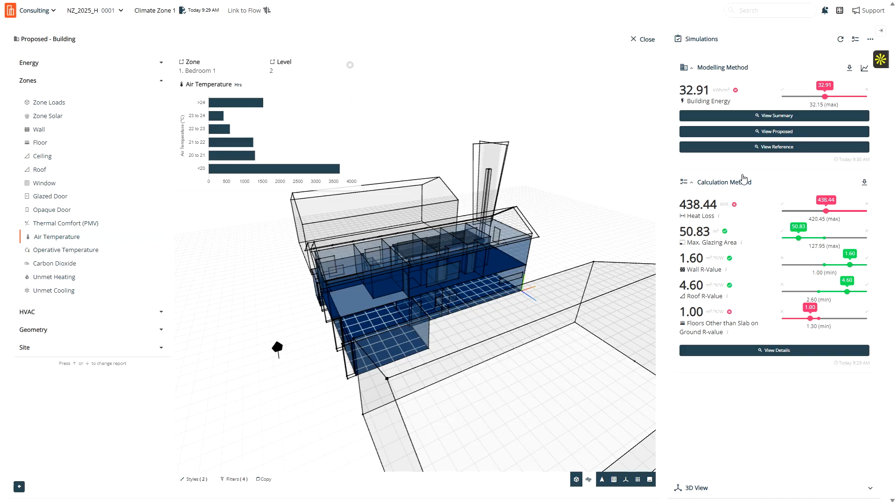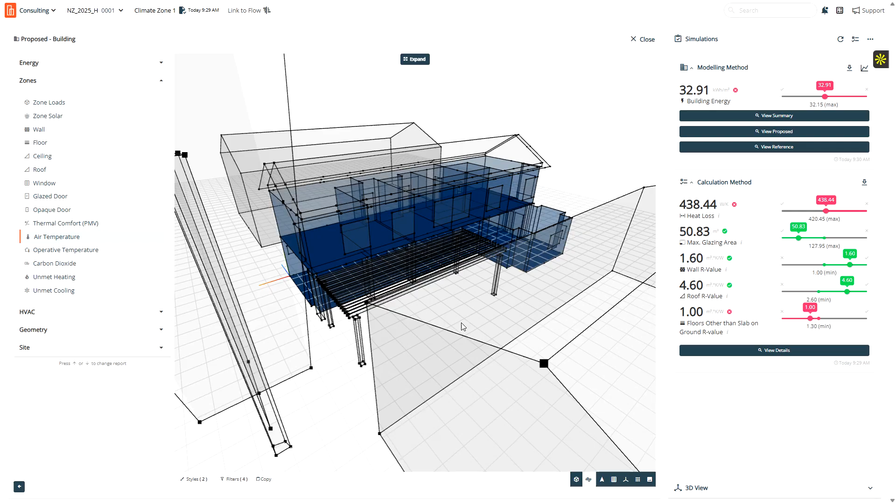The only way you design a building is by understanding the narrative about what's happening in the space. And any risk that you generate through the calculation method is effectively your risk to own, because you haven't looked at the design in enough detail from my perspective. As we build better, we must detail the design. And that's all I'm going to say about it. So that is simply a passive solar kind of design.

Now, we could flip the building and say, what about if we turn this building 180 degrees? And it's very easy to do on the platform. You can go ahead here and just say, okay, I'm going to turn that 180 degrees. Instead of doing that now, I'm just going to show you the result, because it's easier. And then we can flip between the two. And there's not a huge amount of difference, to be quite honest. Let's flip between the two.

This is the north-facing version. This is the south-facing. Okay? So what we can see is that the heating jumps up a bit. The cooling jumps down. But not a huge difference. You'll probably find a big difference in the numbers as we go to different climates.

So I'm going to jump in now and show you the difference between this building with exactly the same specification in Auckland and Queenstown. This is the difference. Okay. I'll just flash between the two for a second. 32.91. Doesn't make a difference whether you understand the number itself. The important point is that you can see that this number goes up as we go to Queenstown. And that's because Queenstown is a heating dominated climate.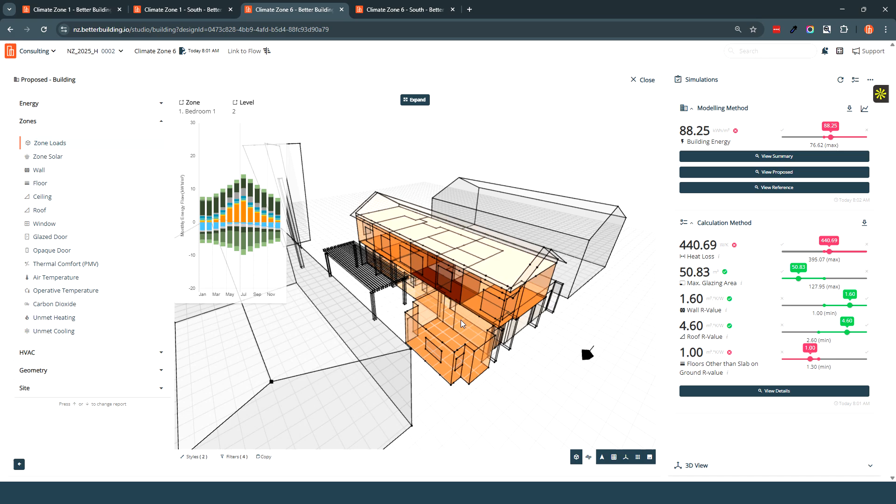So if we go ahead and go into the zones again, let's look at the same sort of thing. So what does the ceiling tell us this time? It's still not bad, actually. It's not bad. The floor.

So negative 55.46. Let's just jump back and just be fair on everyone, and we'll have a look at exactly what that is again for the floor here. And which zone did I select? I'm going to select that zone there and there. So here we have negative 23.19. Here we have negative 55.46. So anyone can see that there is a significant amount of heat loss.

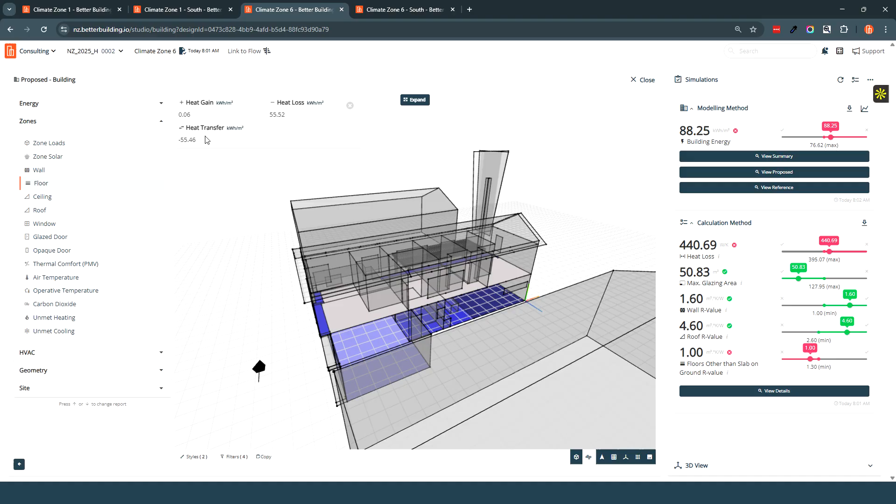And what happens with that, of course, is that your surface temperatures are going to drop down, and you're going to need to improve that slab as you go to Queenstown. That's probably not news for anyone, but it's there just to show you where the narrative will lie. So if we go ahead and do that, we can say, okay, we're going to commit to that, and our floors should 100% be way up here. So let's say 1.6, okay?

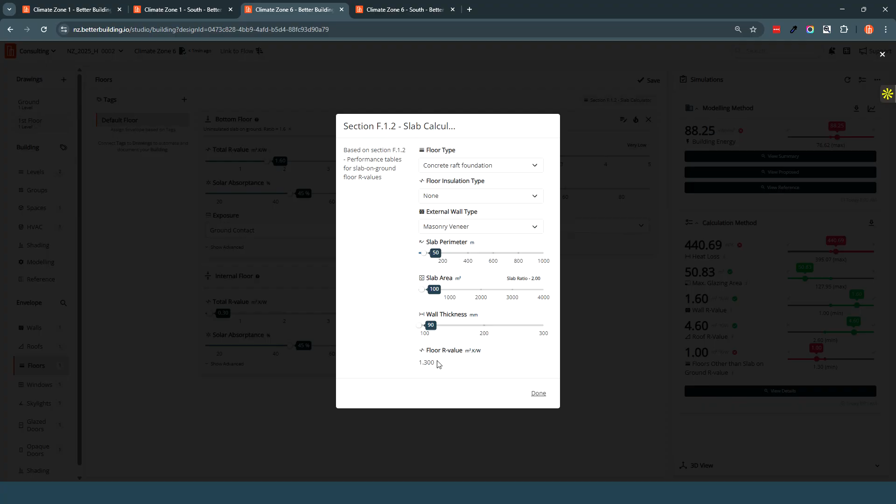And should you want to have a look at the slab calculator, you can do that over here, and that will give you a resultant total R value to pop in to the design. Now I can't remember exactly what the slab perimeter length and area was, so I won't do that now. So you'll have to do a takeoff for that in order to use this. But effectively, we're theorizing that we're going to push that up to 1.6. Okay, so we could do that.

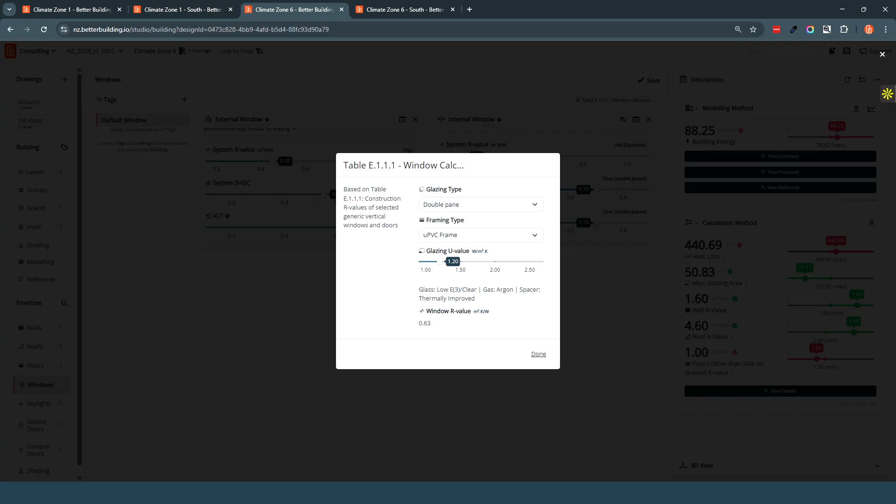We could also jump into the windows and do something very similar. We could say, do you know what? We're going to go wild. We're going to go triple glazing. We're going to put in a UPVC frame, and we're going to change the performance of the glazing. It's going to go way down if it's triple glazing. Actually, I'll do something double glazed and pop in a really high performance 1.2 center glazed and take us to 0.63. Okay, so UPVC now 0.63 across the board, and we can pop that in there.

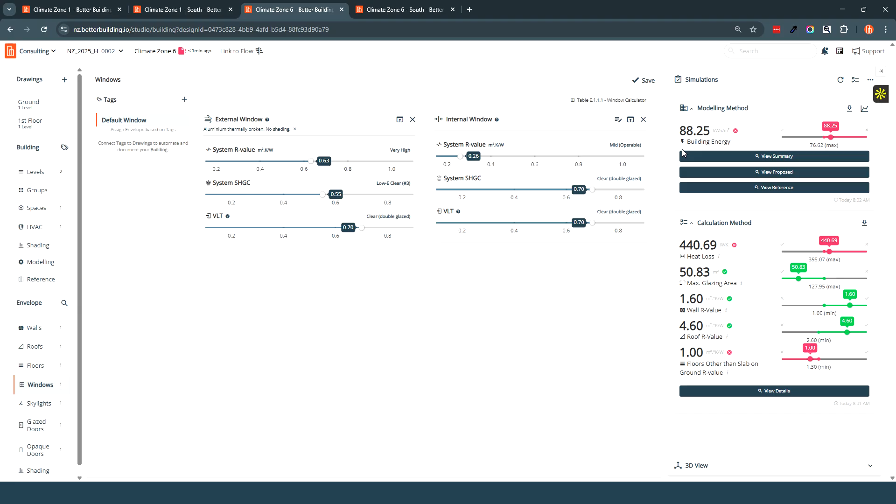Okay, we're just going to make those two changes, and we're going to see what happens with both the calculation method and the modeling method. So we're going to run those now and see what the results are. So the calculation method, bang, that's back. The green across the board is telling us, hey, we've got results here. Everything is complying. And this is one of the reasons why I think the calculation method is going to live on, because we can get outputs there. How far over the line is it? Well, it's quite significantly over the line, as in complying.

Here we can see the reference building, 395.07. That's determined there, 395.07. And then we have the proposed design, 374.61. That's significantly over the line from my perspective. And there is no question that that would be the method that would be undertaken, I think. But we're going to wait for that modelling method to come back.

I'll take some questions if there are any at this point in time, if you'd like me to explain anything that I've gone through, because I appreciate that I'm going through lots of information. We're about to draw down on our time. I'll also do just another shout out. If someone wants us to look at another climate zone, feel free to request what that is, and I'll jump in there. And there you go. This is the modelling method.

Diane, did you want to jump in there quickly? Oh. Diane is my co-presenter, by the way.

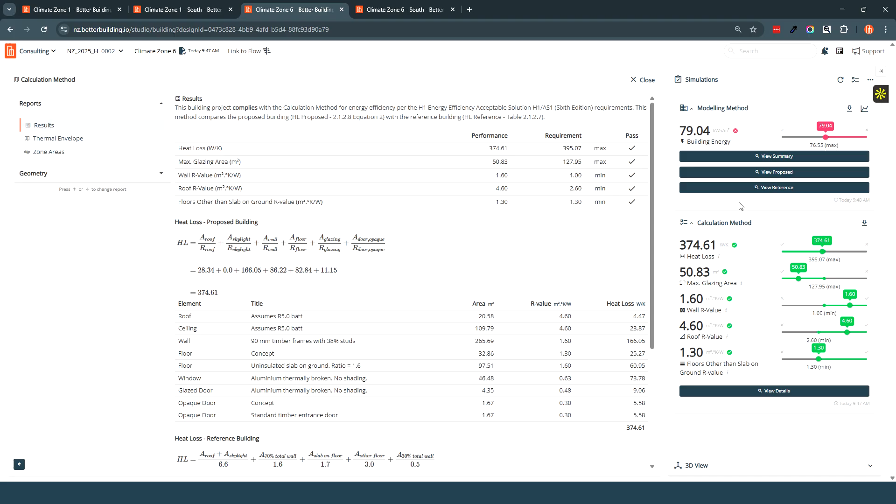So what is my point? My point here again is that the calculation method looks like it's a stronger method, but that's not to state that the results within the modelling method are not advantageous to design. You still want to be assured that your design is what you expect it to be, and you can look at the glazing again, look at the heat transfer, see if that's what you expect it to be, look at the temperature profiles. Much better. Let me have a look at temperature profiles up here.

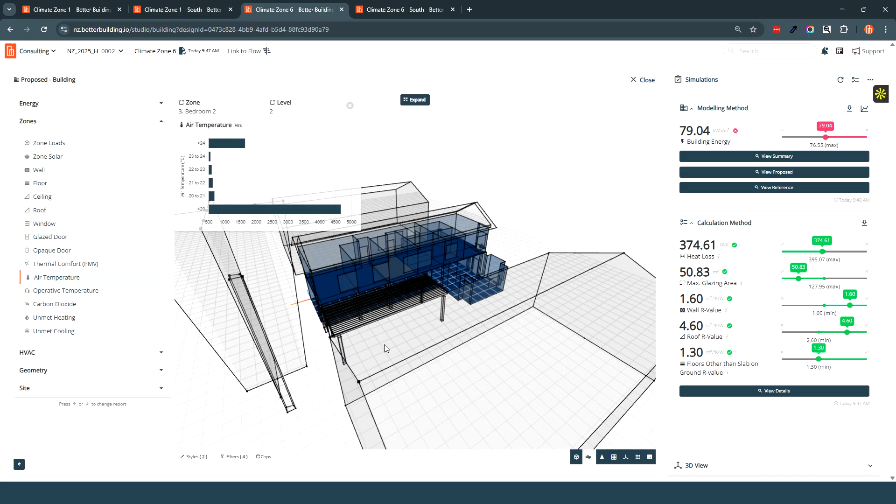They are better, but I'd probably argue that the solar heat gain coefficient is still too high. 0.55. I have a real bugbear with that solar heat gain coefficient. It seems to be the standard value that gets thrown around, and I think it leads to overheating. I think it should not be that high if you are not designing to a very, very high performance building with the amount of design that is required to achieve a comfortable outcome.

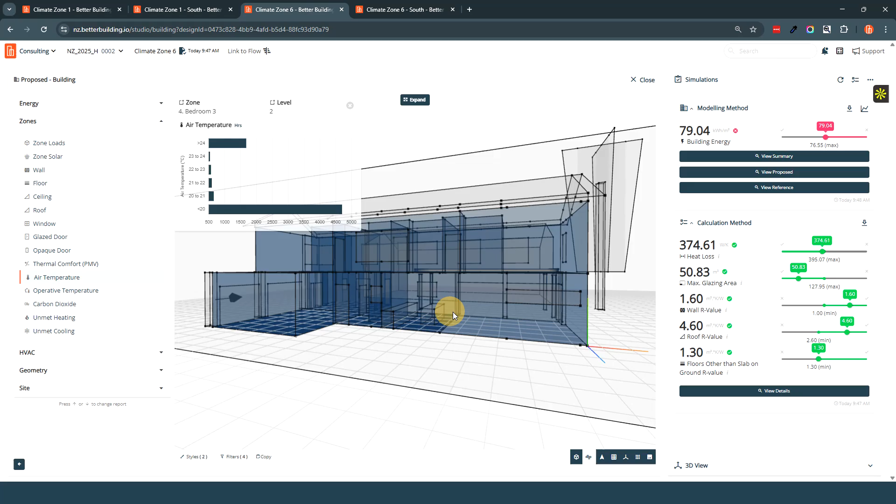But what we can actually see is that there's a hell of a lot of hours below 20 degrees, and that's because the set point within the building, i.e. the point in which we turn the heating on, is 18 degrees. So that's the reason why that is so high. So the calculation method, saving the day there.

Let's go ahead and pull our changes back now. We'll just run this one more time. It's as good an example as any. So we'll bring the glazing back. We can probably insulate the slab perimeter or something around 1.3, and for the roof we can leave the roof, there's no benefit there. And the walls, let's build out the walls, let's reduce the thermal bridging within the walls, and we'll render a total R value of around 2, something like that. So a small change there.

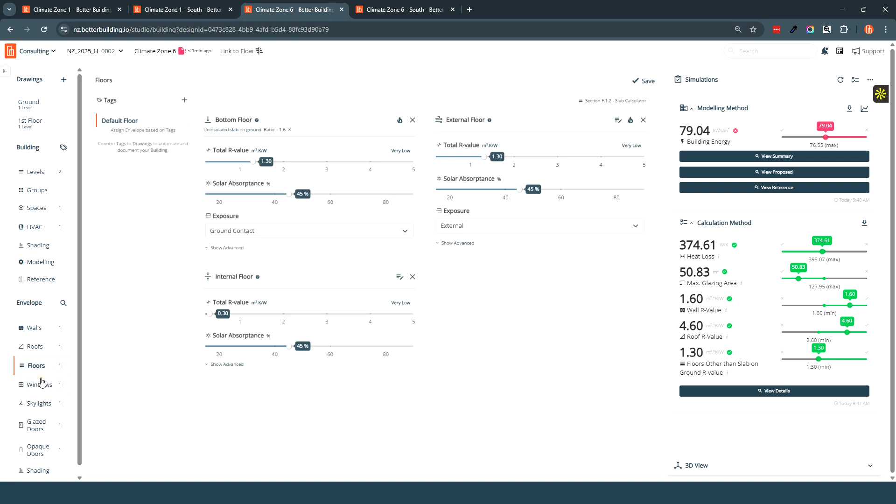What else did I change? I feel like I changed... No, that's fine. I think that's it. I'll leave that there. Actually, there's no operability on that for some reason. I didn't save that. I'm going to rerun that. There you go. So let's look at it. We're looking at the calculation method and the modelling method again. The calculation method is going to come back quick. There it is.

So there you go. I mean, to Diane's point, we're just hitting the right numbers from a calculation method perspective, and the modelling method is going to fail even further. So that gives you a heads up. In a colder climate specifically, it's going to become harder and harder to use the modelling method. I think if you're just dumped a building with a certain design and you're told, hey, let's kind of make this work, you need to design with the modelling method in mind. But the modelling method does provide a jump-off point for so much more value, so much more design optimization, that it can't be ignored. So it's a mixed answer that I'm providing here.

I'm saying the calculation method is very, very likely what a lot of people are going to use because it's so much easier, but you should not use it without further substantiation, or you will leave yourself open to overheating scenarios, additional risk that you really don't want to absorb yourself, because at some point there is an expectation that the overheating risk is being reduced via the changes that have come through. There you go, we've got a failure again on the modelling method.